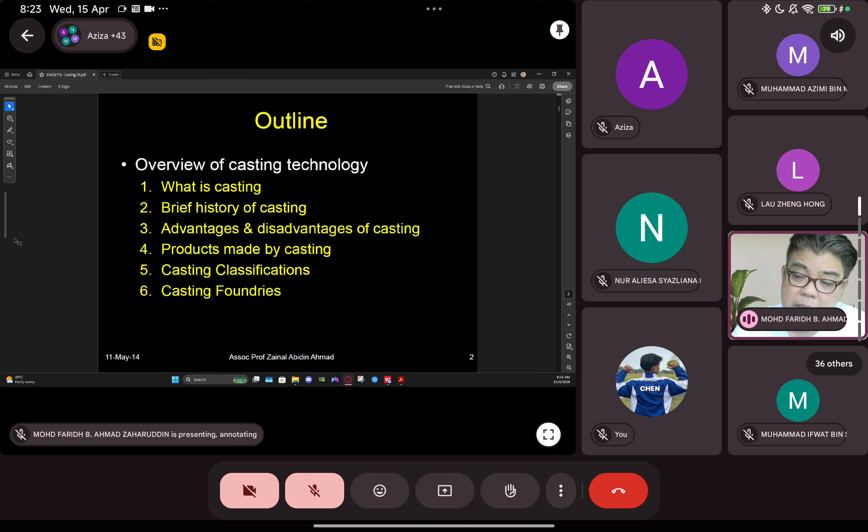And I will explain a little bit on the foundries. Foundries is the place where the casting is conducted, dijalankan di mana, macam mana keadaan dia, production dia macam mana.

In casting, we can classify into a few groups, two groups. One is permanent mold, second one is expendable mold. In casting, mold is very important. Acuan ni sangat penting. Without mold, you cannot perform casting, because in casting you have to melt the metal. Metal needs to be melted, and then you need to pour it, tuangkan ke dalam acuan, into the mold. If you use the permanent mold, they call it die.

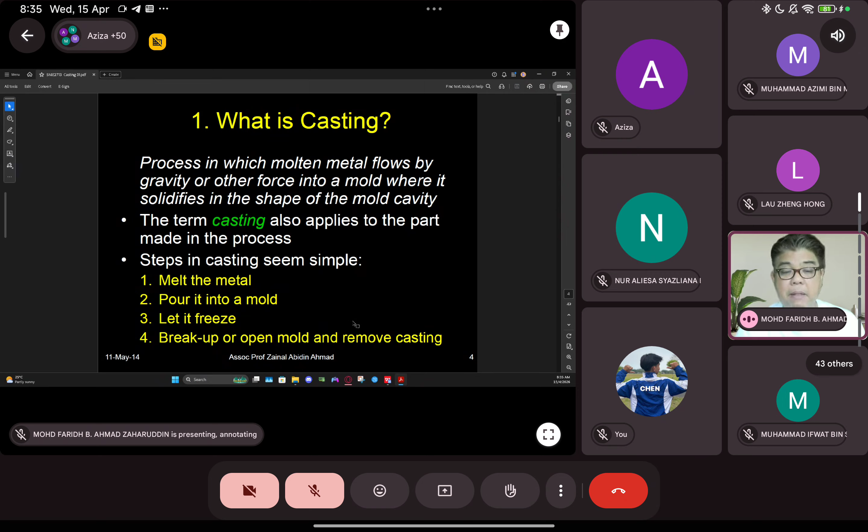The closed part with you, an example I can give is an engine block. Most of the engine parts are made from this, but it depends - some engine blocks, when you buy them, are quite expensive due to the process. They are not using this casting method, but pressure die casting instead.

Or tuang secara gravity - poured by gravity - where the mold is actually made from besi, iron. You can see the difference between the expendable mold and the permanent mold is the outer surface - it's more smooth compared with the expendable mold. Simple - think of your motorcycle engine block: if you look at the cover on the left and right, the casing cover for the gearbox, as well as the magnetic coil area on the left and right side.

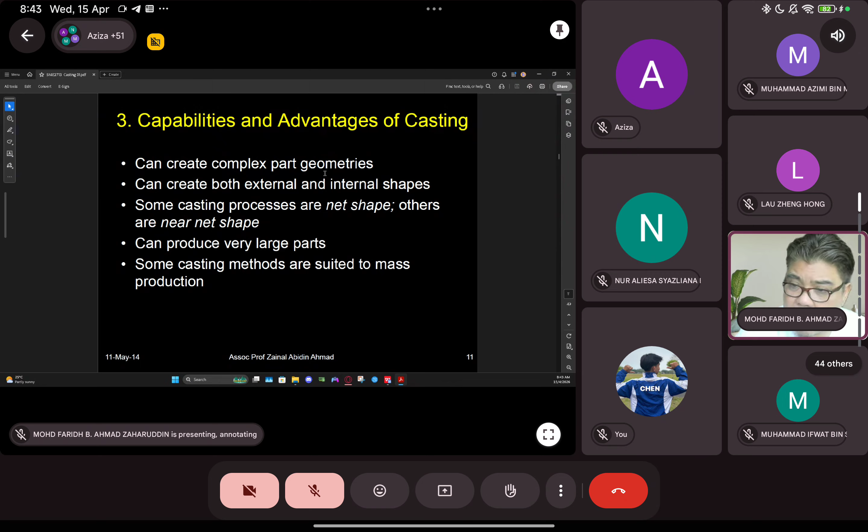And the disadvantage of casting is the limitation on mechanical properties. Why? As we know, we melt materials into liquid form, then pour into the die or mold - it's not similar to metal forming like forging. That's why after solidifying, in some applications we must be aware that casting cannot withstand vibration or high impact. It will crack, it will have problems due to the limitation of mechanical properties.

And the second disadvantage is poor dimensional accuracy and surface roughness for some casting techniques like sand casting.

Some other technique is good, but very limited. If you talk about which one is better in terms of surface roughness, people will say when you use a permanent mold. But when you use this permanent mold, there is the limitation where you can't produce a complex shape. Okay, internal, external is limited. Okay, but you will get a good surface roughness.

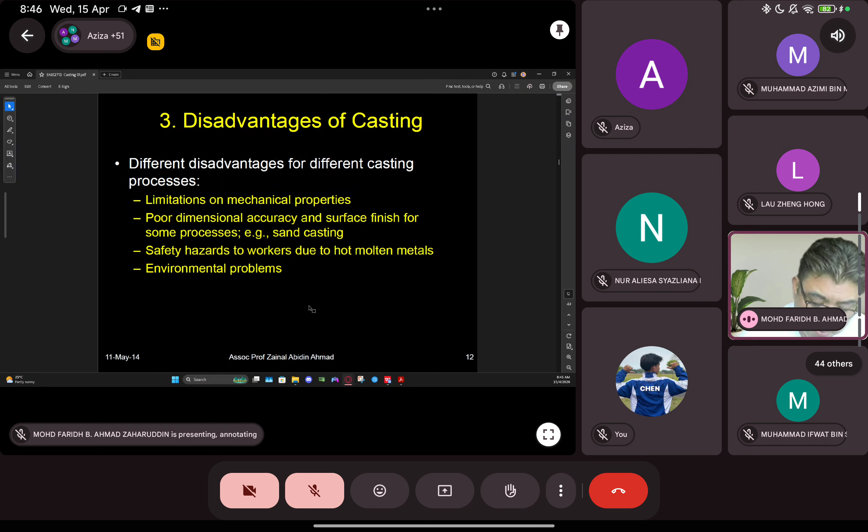The last one is safety hazards, because all these workers, all the operators, they are close to the molten metals, which is dangerous, and the fume, you know, these aluminiums, when you melt them to a certain temperature, the fume is hazardous ataupun beracun, bahaya, and environmental problem. Okay.

Okay, these are parts that can be made by casting. We can see there are big parts like engine blocks, machine frame. Machine frame ni tahu tak frame? Frame ni. Machine, macam machine apa-apa kamu tengok mesin besar-besar dia punya frame. Contohnya kalau nak kecil, banyaklah part-part for the memasak kitchen yang banyak yang guna dekat production, dia punya frame machine tu diperbuat daripada casting.

Close to you, especially kakak-kakak ni suka buat kek kan, you all suka buat kek, mixer. You know mixer, tahu tak mixer? Tanya orang lelaki, diorang tahu makan aja. Kena tanya orang perempuan. Mana orang perempuan ni kat sini? Oh, orang lelaki ada yang tahu. Bagus. Okay.

So then you know, mixer, dia punya mainframe tau. Kesemua mainframe, instead of motors, bukan. Mainframe tapak dia tu is made from casting. Now you know. It's made from casting. And then small parts like jewelries, dentals, banyak. It did mention about small statue, some of the frying pan. It's made from casting as well.

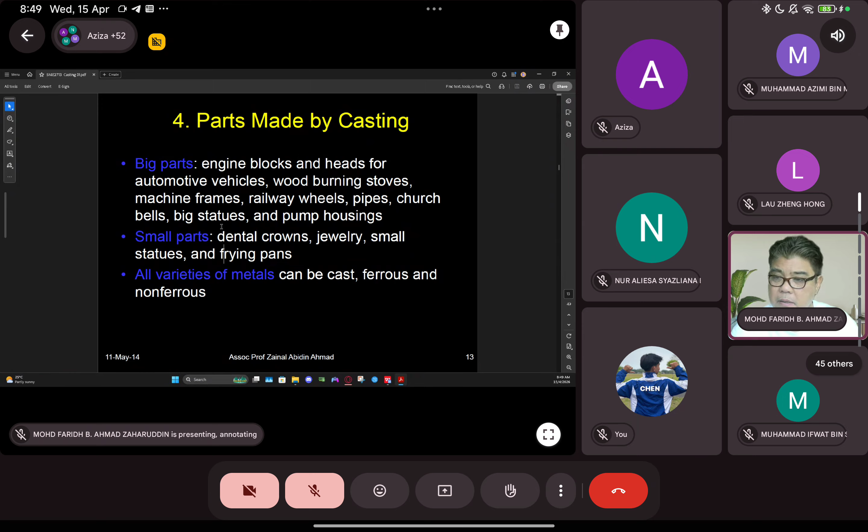If not, then there will be a problem. There will be a defect. Okay, some of the defects where it's not completed. When you pour, you think that it's already filled up in the cavity. Once you remove it, then you will see there is a defect. Okay, defect yang mana dia tidak memenuhi semua ruang, especially in the cavity area. Okay.

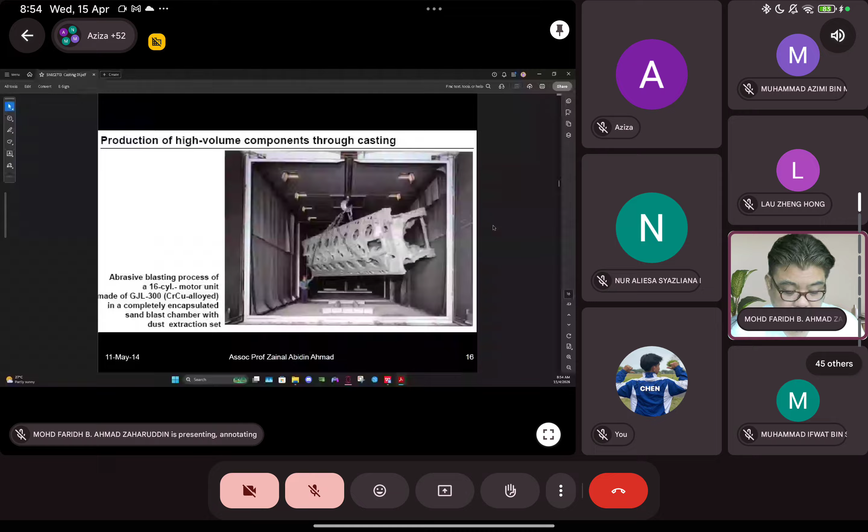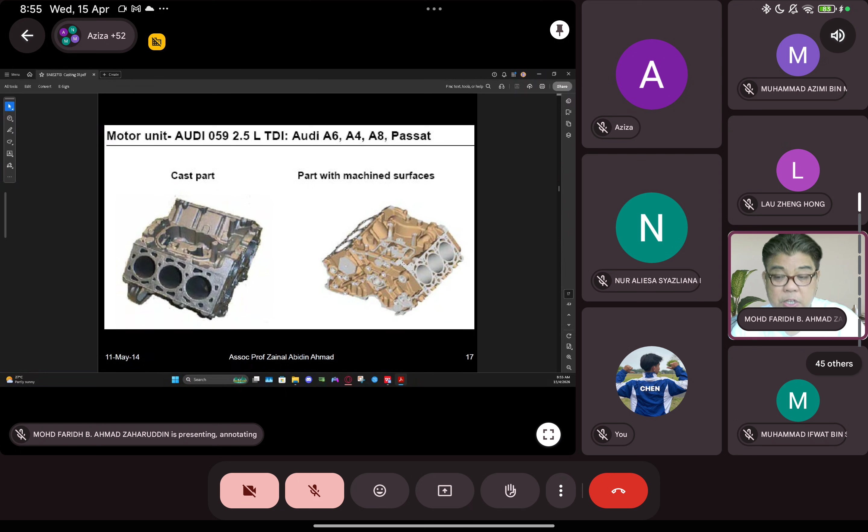This is the Audi A6, A4, A8, as well as Passat engine. This is the Audi 2.5 liter TDI. You can see that this is the engine block after casting, and there is a chocolate color, I would say brown color, and silver color. The silver color is the surface that has been machined. So from all of the casting part, only a few percent will have a secondary process, which is machining, due to some of the requirements.

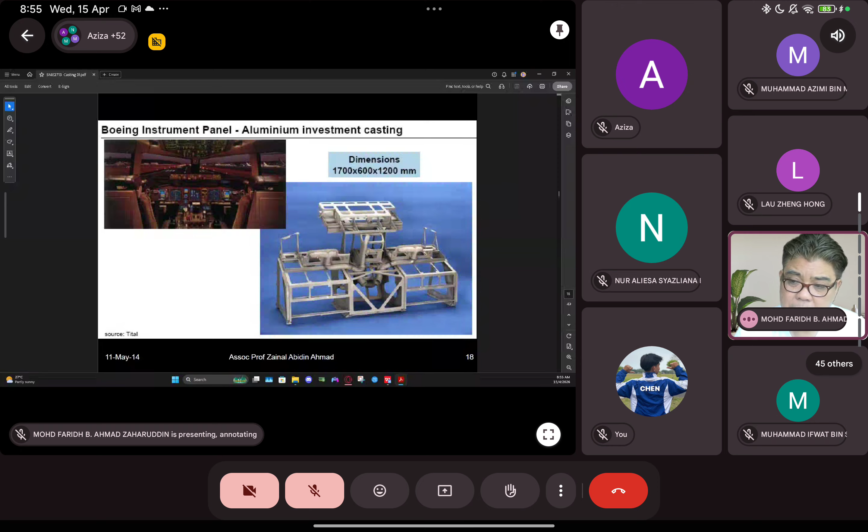And this is the aluminium investment casting part that is used in the cockpit for the Boeing instrument panel, due to the lightweight. Other casting parts, we can see this one. I think this is the engine casing for the gearbox, the gear box. Okay, this is a top cover of the engine, the top part.

But most of the advanced cars nowadays are not using this casting or metal. They use a high performance plastic. Most don't use this anymore. You look at cars like my car, I think BMW, Peugeot, Citroen, most European cars are not using casting anymore. Many cars now all use high performance plastic.

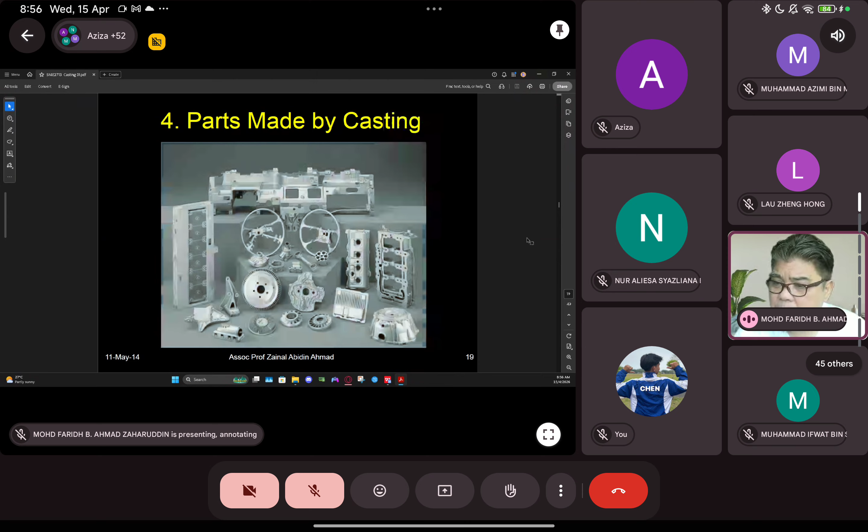Oops, sorry. And this is another example where it's made from casting. You can see that this is the brake disc, as well as some of the joining parts used in some other area in the engine. This is, I don't know what to say, but in the gearbox, I think this is inside the gearbox.

Okay, and this is the compressor on the air generator area. The compressor has a piston, and you can see they use a motor or the engine, and inside there is a piston that compresses air into the air tank. Okay, and this is as well on the gearbox side.

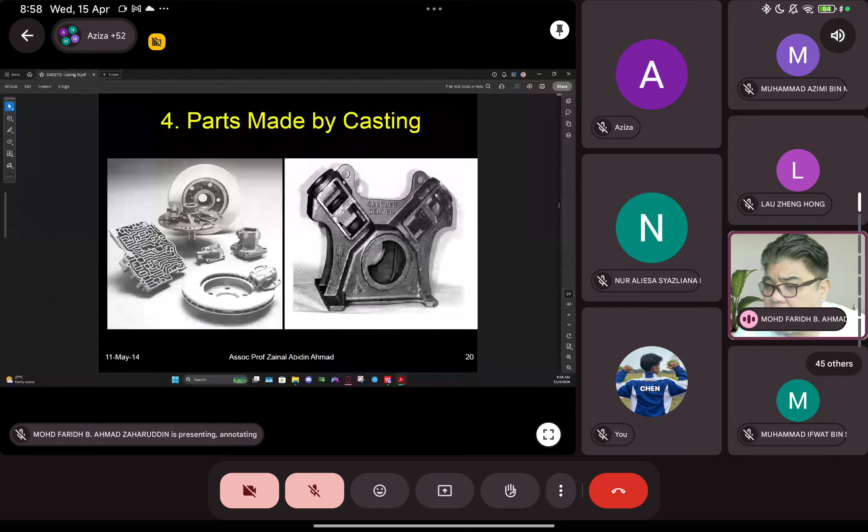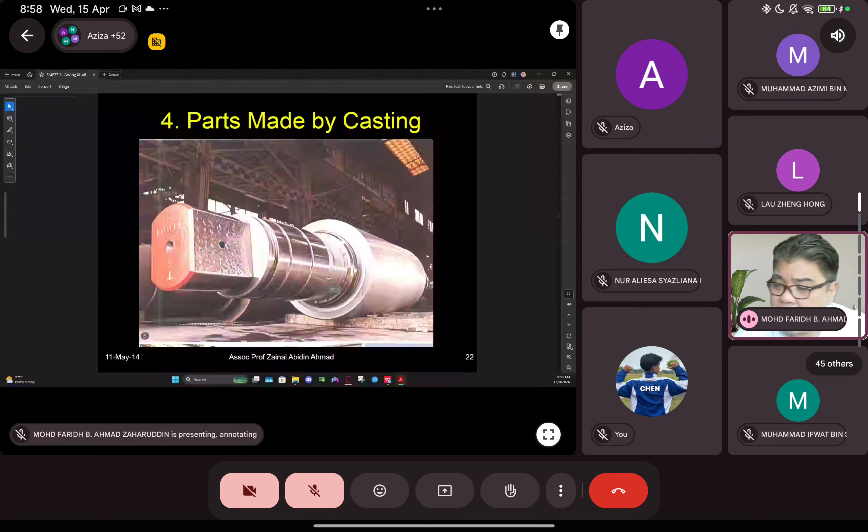It's made from aluminium, and if you can see the shape, this is made from pressure die casting. This is from sand casting. This is gravity. This is pressure die. We can know pressure die because of the surface. This is a very huge shaft made from casting, applied in some applications, maybe for the engine, or for material handling, heavy machinery.

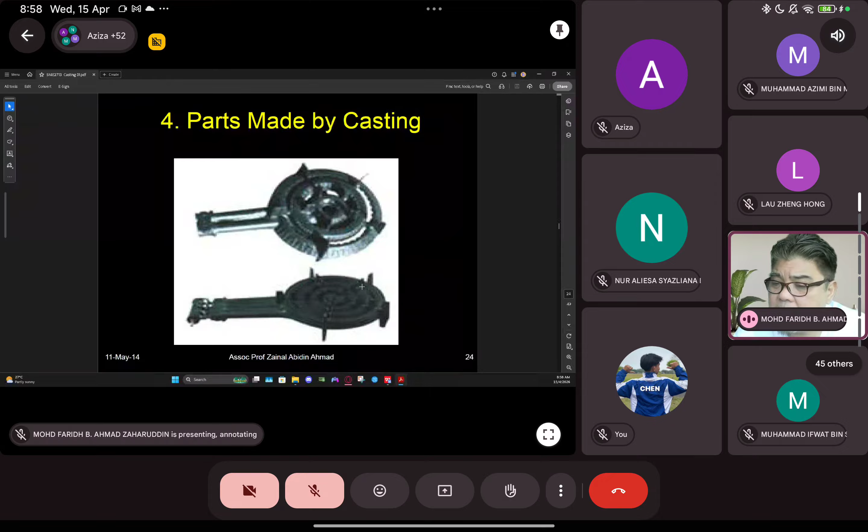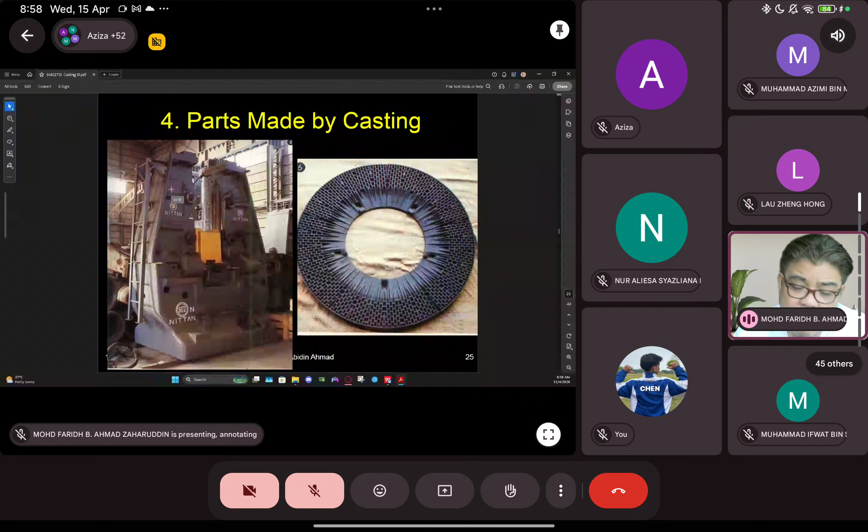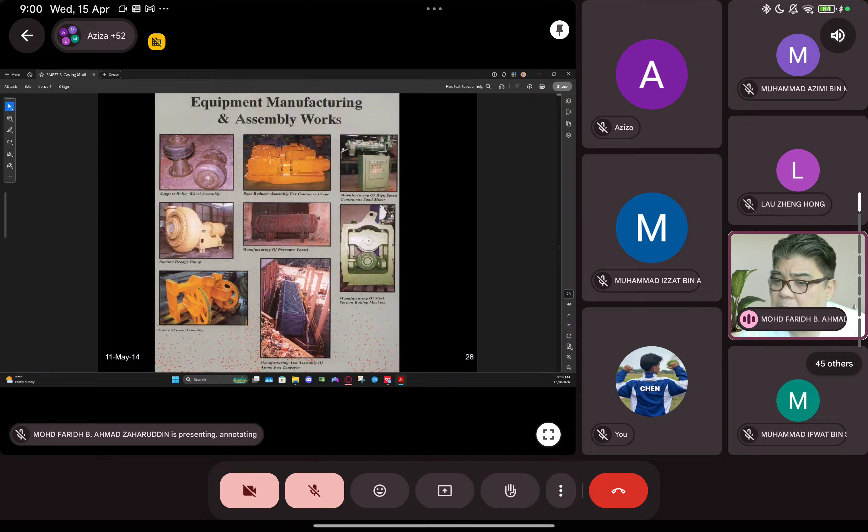Sorry. And these are some other parts produced for the mining companies, which are made from casting as well. And these are some of the equipment for manufacturing and assembly works that are produced by casting as well.

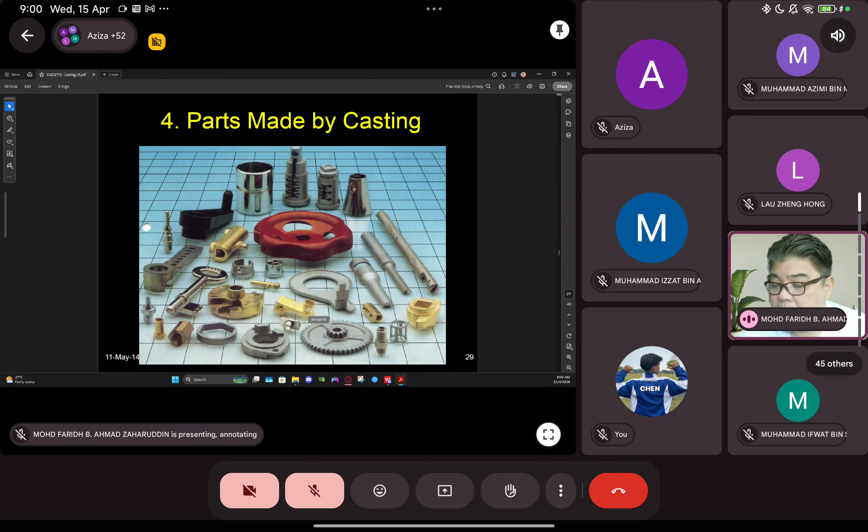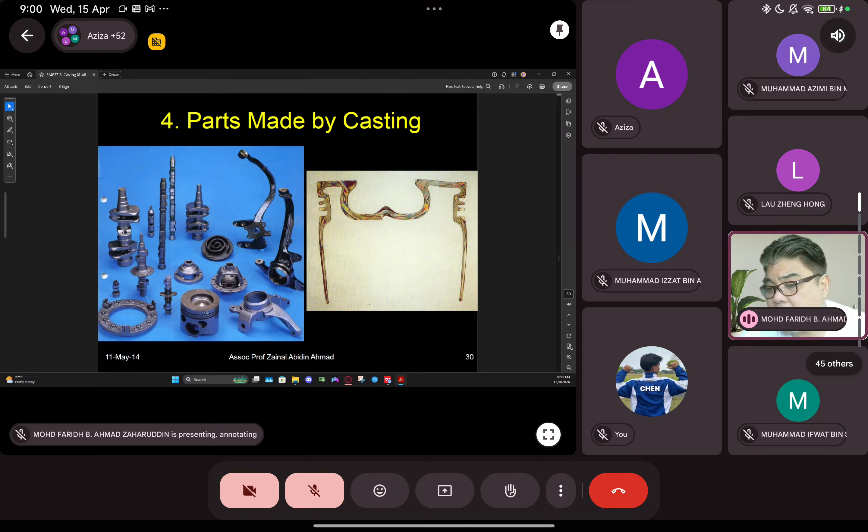Banyak ini semua pada casting. What different methods in casting, there are many. You can see this is the crankshaft. We have camshaft, crankshaft. This is a coupling area. Ini bagian to handle a wheel, lower arm. We have this piston, cams for the motorcycle, small parts.

Okay, this is, I would say, the intake and also outlet manifold in front of the engine block and as well at the back of the engine block, untuk kemasukan angin dan juga untuk keluarkan asap. And this is a gearbox casing. This is at the area of,

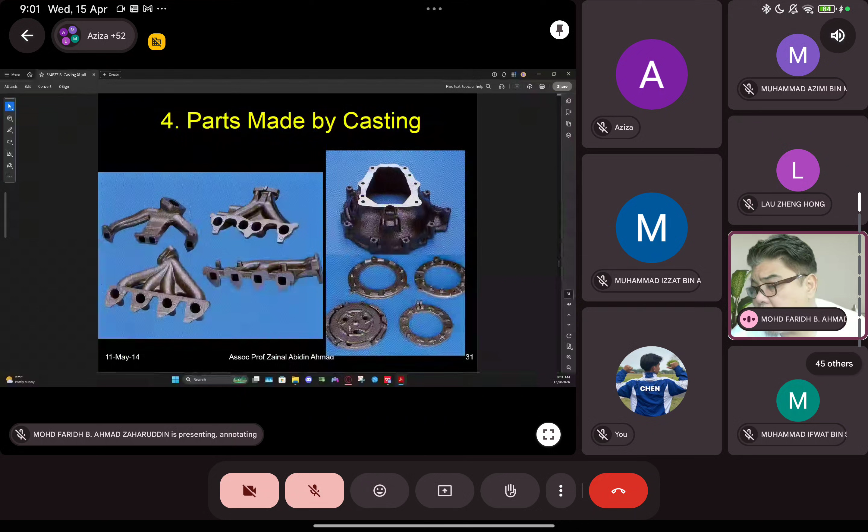I'm not going to say all of them are casting, but some of them are actually from metal forming. That's why the gearbox area is quite heavy. I think this one, most of the part is made from metal forming. This part is not made from casting. This one, yes. Okay, this is alloy rims, alloy wheels for motorcycles.

I just want to share some knowledge, especially all those boys, you have your own motorcycle. Janganlah terpengaruh sangat to buy all these cheap alloy wheels. Cheap alloy wheels use low grades of steel and it makes your motorcycle berat, and the fuel consumption will be very high. That's why your motorcycle cannot go high speed. If you want your motorcycle to have high pickup, a good speed at low and high speed easily, just pull a few percent of throttle, it goes.

Okay, I give you some tips: try to get good alloy wheels. Good alloy wheels, you need to spend a few thousand. Yang mana dia sangat-sangat ringan. And you need to have good tires. Tires yang murah-murah ni berat. Dia tak boleh tahan certain temperature, laju tak boleh. So you need to use a Michelin, which is a high performance tire. It's expensive. Good alloy wheels, even though the size is big, are good for cornering and very light, compared with cheap tires and cheap alloy wheels, which make your motorcycle berat.

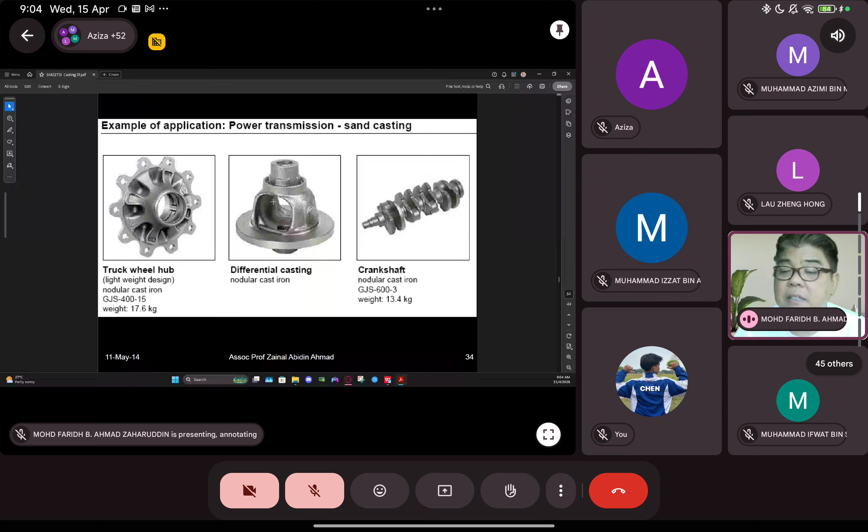Okay, this is some other parts as well. Kasih banyak gambar ni pasal casting. Okay, this is to show jenis materials. This is a crankshaft. This is a differential casting. Okay, this is a truck wheel hub. Banyak. You can see all this. Banyak sangat pula contoh dia.

Okay, and how we classify casting: first is type of mold. Whether it is consumable. Kadang confuse lah, banyak sangat. Consumable, expendable, and temporary. Normally people will guna expendable mold. Sama je, consumable, expendable, temporary. We have to destroy the mold every single casting process. To get the casting part, you have to destroy it. Okay. Second is permanent. We can reuse the mold. Look at the pattern.

Okay, by pattern. Pattern ni mungkin now you tak nampak, but after this you understand. Pattern, there are two types. One is consumable, and one is permanent. Permanent maknanya pattern ni can be used again and again. We make the pattern to be used in expendable mold. Nak buat acuan, mold from sand, you must have a pattern.

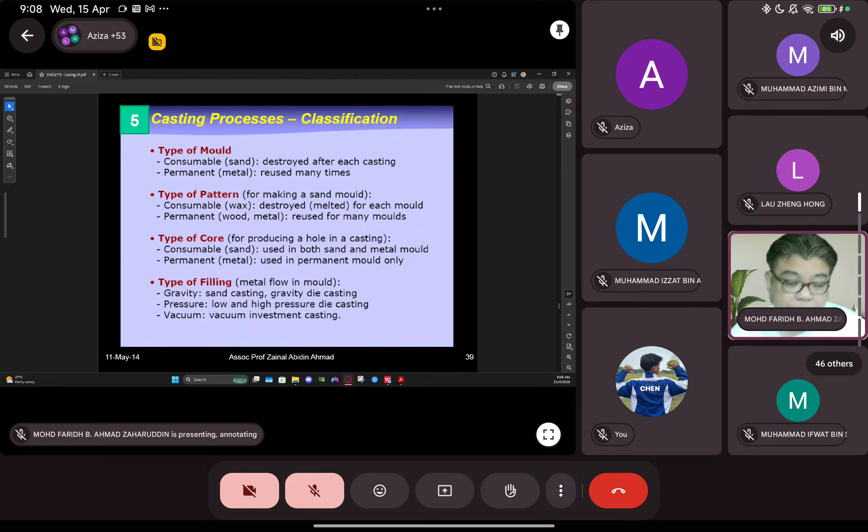Okay, 1 minute. I need to drink. Okay. Oh, sorry.

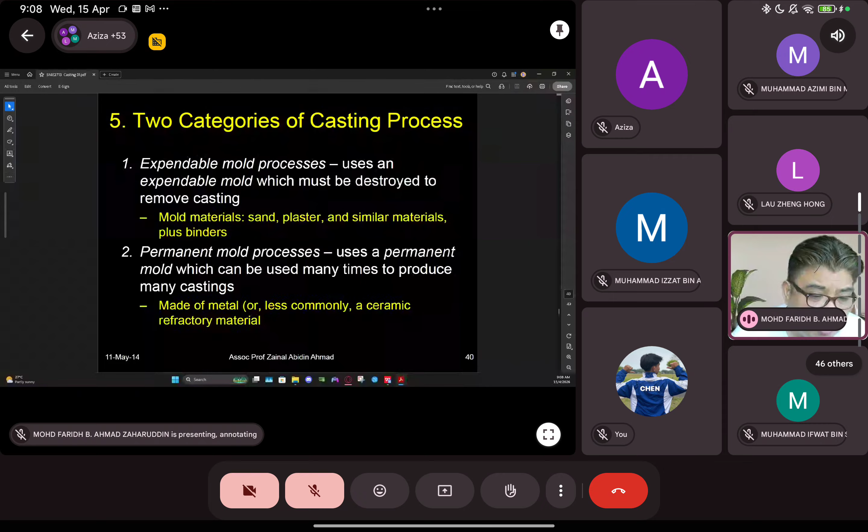Okay. Before we continue, I want to show you a video about casting. So please enjoy this video. Can you see the video now? Not playing yet. This video is about how they make... I'm going to share it with you later. There is a video to show how casting is used to make this V6 engine. Now if you look at this one, this is a core.

I will show you. Okay, this is 6 minutes, enjoy. It's like we're having a break. You can have your breakfast as well for these 6-7 minutes by watching this video to help you understand more of what I explained just now.

I don't know whether you can hear the voice. If you can't hear the voice, please use this. Then I'll try. Oh wait. Oh okay, I'll try. Where do I play this? Yeah. Okay, can you hear the voice?

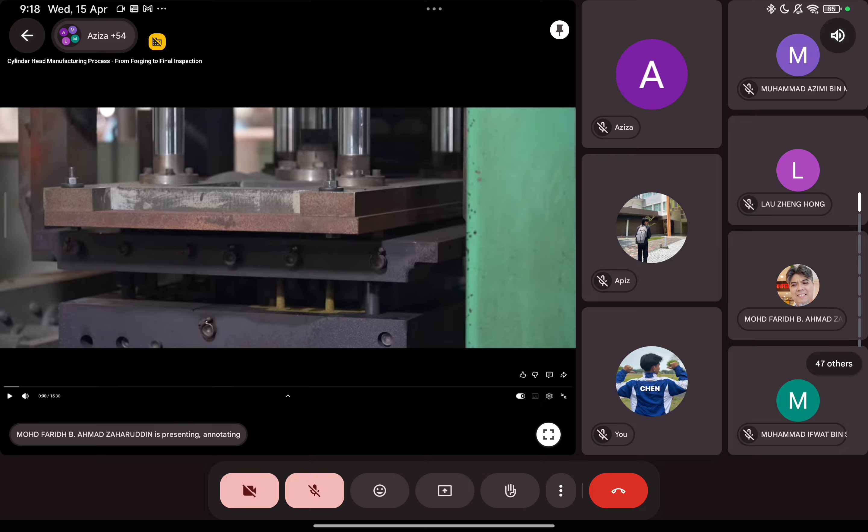Okay. Is it clear? Did you watch the video? Can you hear me? Alright. I'm going to show you another video. The previous video showed new modern techniques for making this V6 engine. I'm going to show you how other foundries make these engine blocks as well.

Not engine block by technique. Wait, I'm going to find a good one where you can see how they use this. Okay. This is about a 10 minute video on how they make centrifugal pump bodies, made in I don't know which country. I'm going to share it with you.

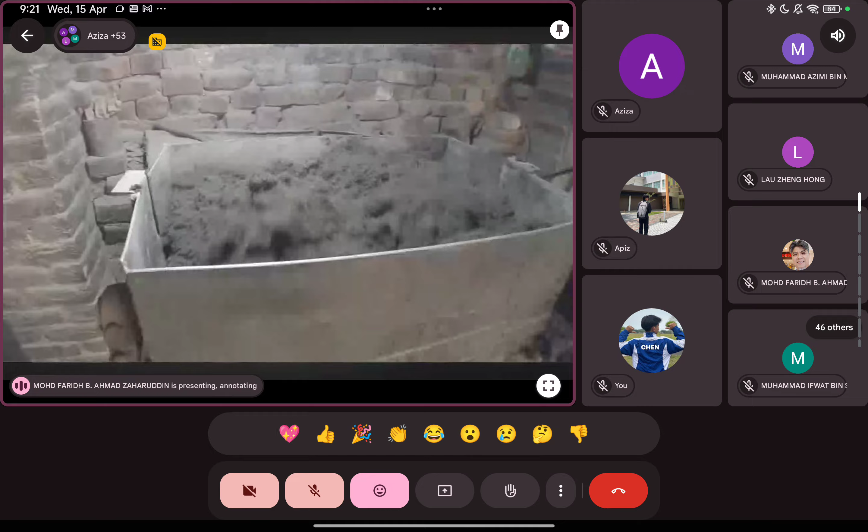Okay, can you see the video right now? Can you see the video right now? It's not playing yet, but please someone respond. Okay, I'm going to play it now. So watch this video. Guys, this is a sand casting technique for producing a centrifugal pump.

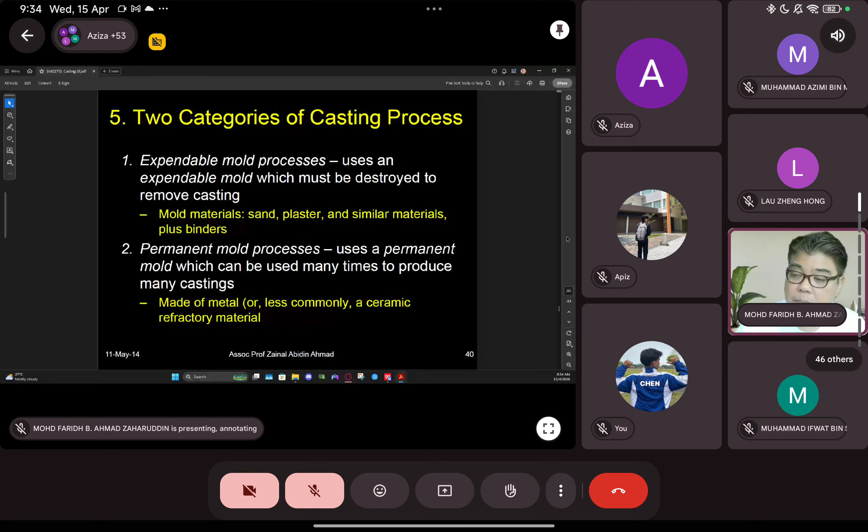This is a type of casting process by certain classification. For example, in the permanent mold, we have continuous casting techniques, gravity die casting, squeeze casting. We're going to look into these, not all of them, but continuous casting, gravity die casting, squeeze casting, centrifugal casting. They divide into three: injection molding, compression molding, and also rotational molding. Rotational molding is like when you want to make those parts and so on. Then permanent pattern is used in the sand casting and shell molding technique.

And then we have expendable mold or expendable pattern, meaning using a temporary one. We use it as in investment casting, ceramic, plaster. Ceramic and plaster are like brother and sister. Why are they normally in one group? Because one can stand high temperature, the other cannot. Simple as that. The advantage of ceramic and plaster is you can get a fine surface roughness. The only thing is the temperature cannot be too high. Even though ceramics can be high, but not too high. So high temperature will go to other processes.

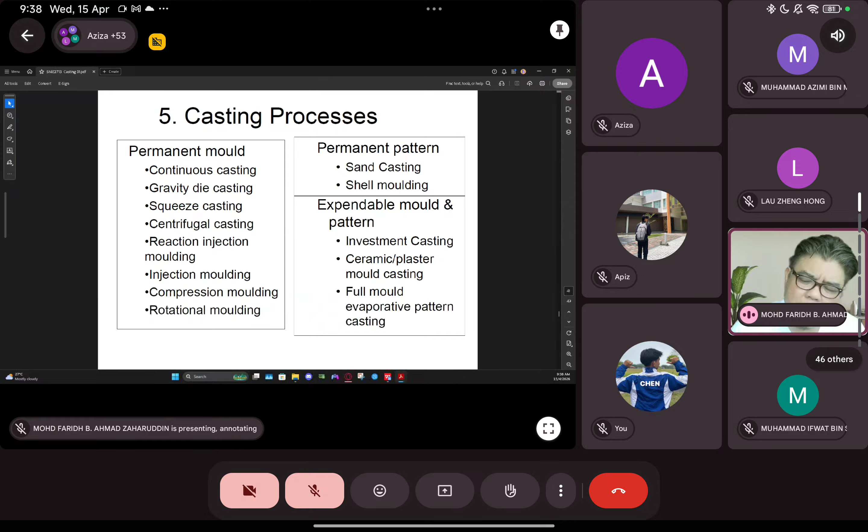Some of the terms have 2 or 3 names sometimes, like evaporative pattern casting, which they also call lost foam technique. Like investment casting, some use the term lost wax technique because they use wax as the pattern. Before they pour, they put it into the oven and melt the wax, so the wax melts and you get the mold cavity. So investment casting, sometimes they call it lost wax technique.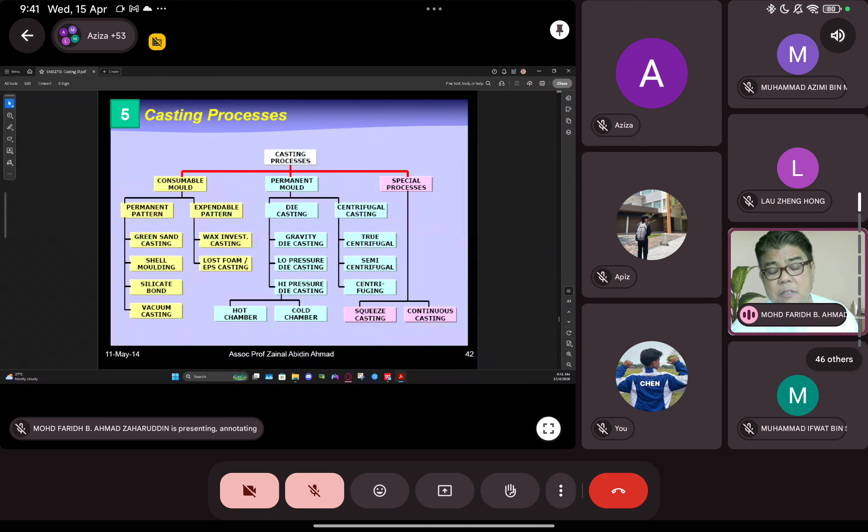Squeeze casting is very special. Squeeze casting has advantages and disadvantages. More intricate geometries are possible if you use the expendable mold. Part shape, especially in permanent mold process, is limited, and due to that you need to open the mold. The permanent mold is basically economic in terms of high production. If you produce less, it's not practical. It must be at high numbers of casting parts being produced.

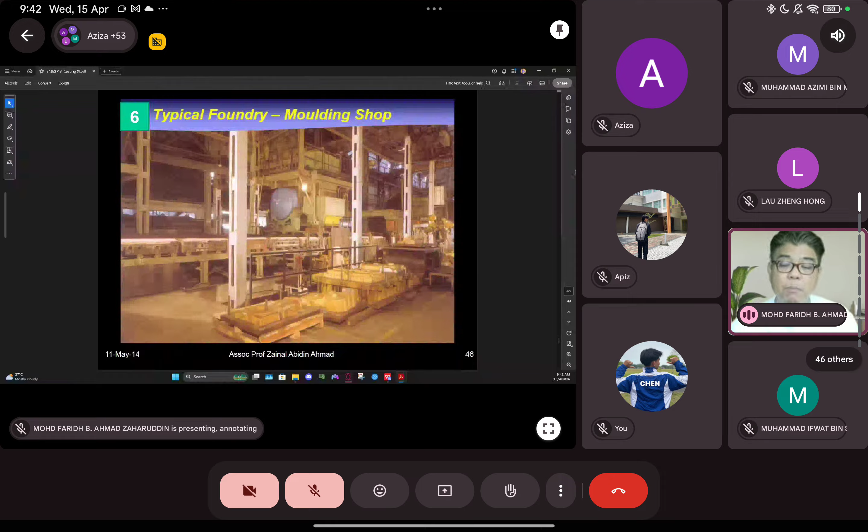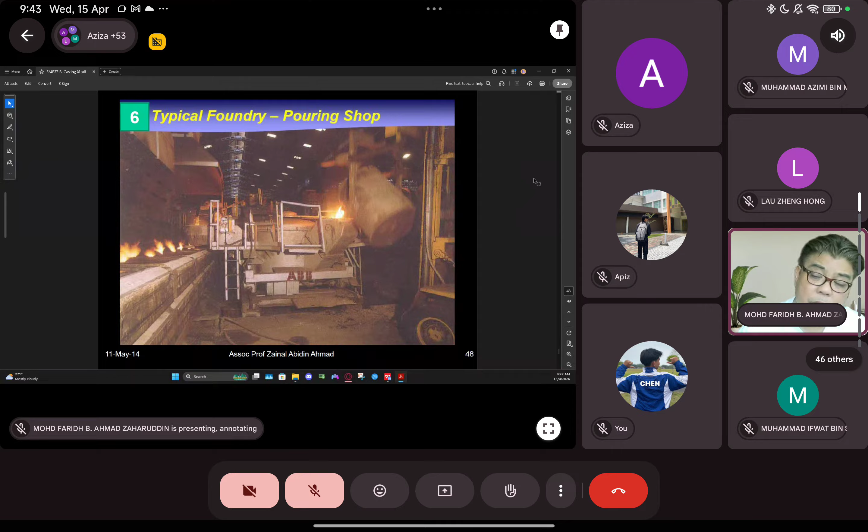This is molding, you see this is a ladle. This is the operator, pouring the molten metal inside the mold. This is all the mold.

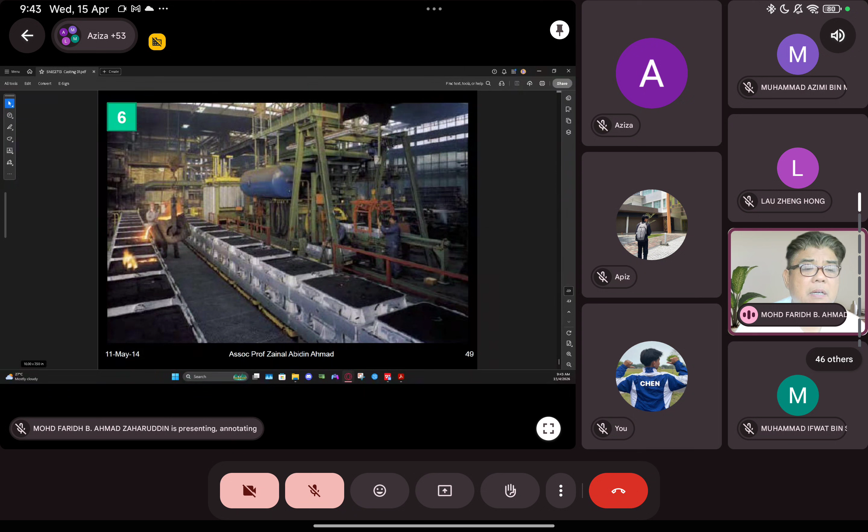It's finished? Okay, so today I deliver the first slide in this chapter. So we are at the end of this class for today. I need to take your attendance. Hope by sharing those videos previously, it will help a lot of my students to understand earlier about the casting. I hope it will help you a lot to understand. Basically, need to understand.